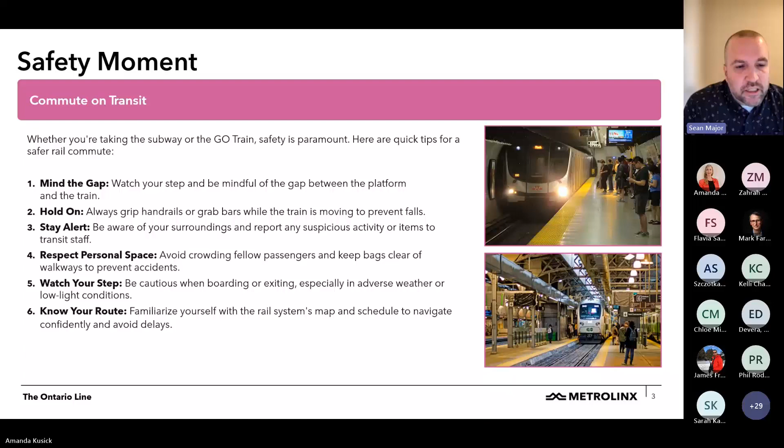Be sure to watch your step. The weather is all over the place, so sometimes it can be slippery out there. Before we start our journey, if you can familiarize yourself with where you're going and the schedule, you can navigate confidently and avoid any delays.

Welcome again, everyone. It's great to have you all here as we talk about piling activities in the Moss Park area. As I mentioned earlier, I'm Sean Major, and I'm the Senior Advisor for Community Engagement with Metrolinx for the Ontario Line. I'll invite all our presenters today to turn on their cameras, and we'll have them introduce themselves. I'll turn it to Daniel to introduce yourself.

Hi, good evening. My name is Daniel Sisra. I'm a senior manager with the Subways sponsor team here at Metrolinx. I'll pass it over to Eric.

Good evening, everyone. My name is Eric Devera. I am the Deputy Station Manager for Moss Park, and it is my responsibility to safely and proficiently deliver and construct the Moss Park Station for the community. I will pass it over to my colleague, Francisco, or Aga, if Francisco is not here.

Good evening. My name is Aga Szczotka, and I'm Environmental Manager for OTG. Great, thank you, Aga.

I want to talk through the agenda for tonight's meeting. We'll have a quick overview of the Ontario Line, speak to some progress to date, and look ahead at the construction that's coming. And of course, tonight we want to really focus on the piling work that's going to be happening in Moss Park. At Metrolinx, it's really critical that we are working together to try and reduce any impacts on community members as a result of the construction. We'll also have a Q&A and discussion at the end of the meeting, and I'll talk more about that in a moment.

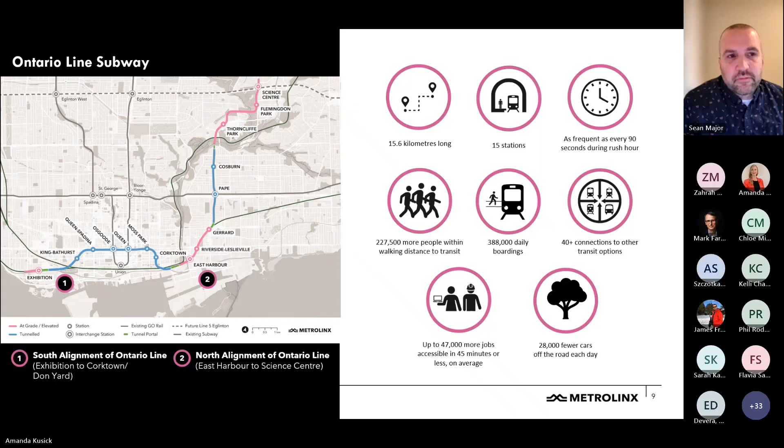I'll turn over to Daniel to speak to some details about the Ontario Line. Thank you, Sean. Yeah, so I'll introduce you to the project. I'm hoping that a lot of you have heard about the Ontario Line.

The Ontario Line is a 15.6 kilometer subway line that we'll be building through the city of Toronto. It will be going from Exhibition Station, as you've seen on the screen at the bottom left corner. Then it will go underground in the blue line, cutting through downtown along underneath Queen Street, heading farther east towards the Riverside, Leslieville area, before it heads north on Pape Street, cutting through Pape Station underneath Pape Station that's there, and farther north towards Thorncliffe Park, and eventually terminating at the Eglinton and Don Mills future station for Crosstown Science Center there.

Just some key facts around Ontario Line. Ontario Line will be a 15 station subway line with very frequent service, as frequent as 90-second service during rush hour. It will service a huge number of individuals and communities in the areas that it's touching, and even through connections, over 200,000 people will be at walking distance to the stations. This will basically generate over 380,000 daily boardings, which means a lot of people taking the subway.

The way the Ontario Line was designed and planned really encourages, was with the intention of creating connections and increasing reliability of the overall transit network, with over 40 connections, some major connections at the Queen Osgoode stations for Line 1, connections at Pape where this line will meet Line 2, TTC lines, as well as many TTC streetcar and bus connections, and 2 future major connections at GO services at Exhibition Station and East Harbour.

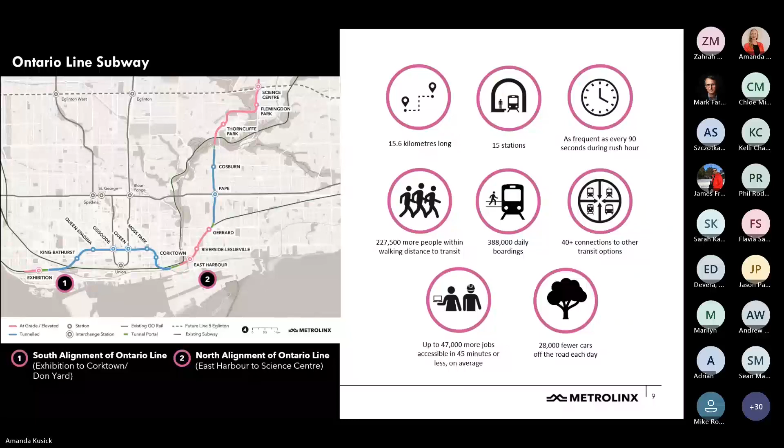The OTG group, the Ontario Transit Group, will be delivering 6 underground stations. 2 of those are very important complex interchange stations right underneath the existing subway at Osgoode and Queen, and they will do that while not impacting and maintaining the operations of those 2 stations, as well as one major above ground connection at Exhibition Station. Finally, while also building all the stations, the OTG will be delivering and building a tunnel between all these stations in the downtown, that's around 6 kilometers of tunnel.

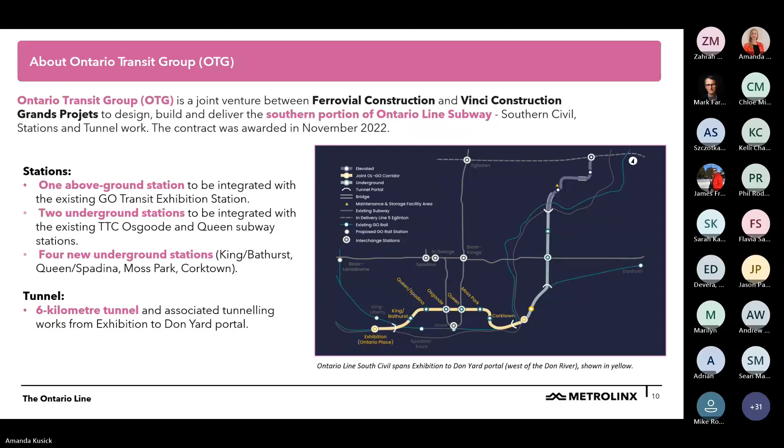So with that, I will hand it over to Eric to take us through the construction aspect of Moss Park.

So as detailed before, the main purpose of this program tonight is to discuss the piling operation and what the community can expect from that at Moss Park. But first, I'd like to give a little bit of context of what we've been doing to lead up to this milestone for the station, and then what we can expect after the piling completion.

Since the fall of 2023, in November, we have been installing what we call protection and preparation. For the protection, it is the hoarding installation, which is just a fancy way of calling our site perimeter fencing. If you've been in the area recently, that would be the plywood perimeter that we've developed around the site. Its primary purpose is for public safety, to delineate the public from the construction activities within the site, but it does provide additional benefits as well, which we will touch on later in the presentation.

For preparation, we have been rehabilitating the site within the fencing to construct a working platform that's going to be suitable for the duration of the project, allowing us to deliver the station proficiently and safely. All of those efforts have been leading up to this week, which we are now ready to begin piling. In the coming days, you will see the program we talk about this evening, which is going to allow us to begin the piling program. After we complete piling, the next steps in the summer timeframe are the station excavation, and after that will be construction of the station from the ground up. But we'll provide more context on that later.

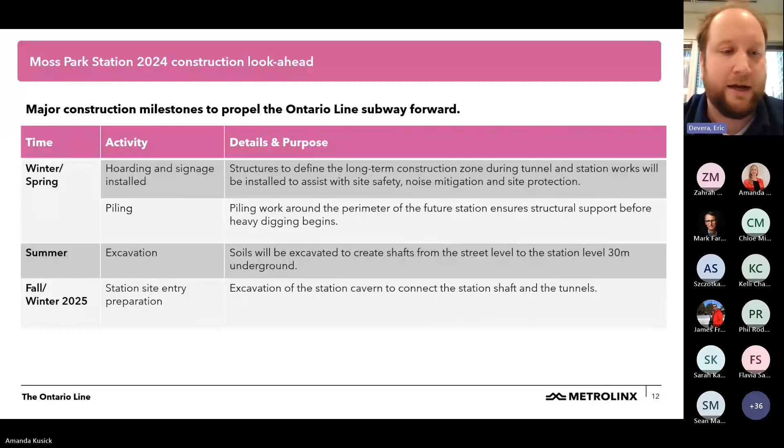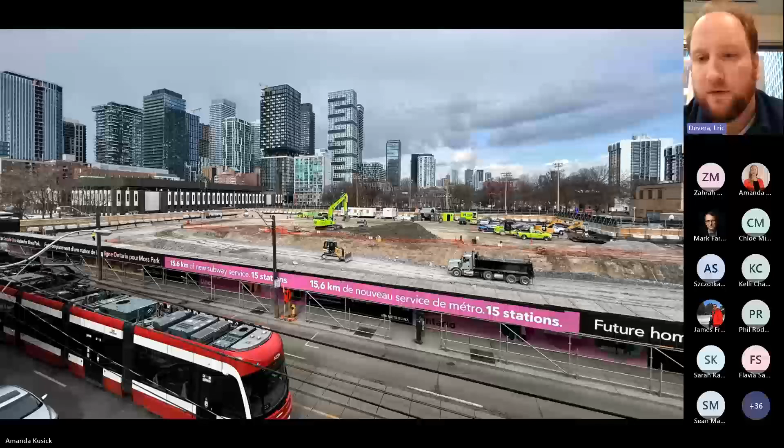As always, we try to provide visual context to the community to help better understand what we're doing and what we're trying to accomplish. Here's a good visualization of Moss Park as it was a couple of weeks ago, through our progress in February. You get an overlook from the Queen Street side here. Very visible is the perimeter protection, what we call the hoarding around the edge of the site, and a bit of context of what goes on inside the site for platform preparation. As it is today, it's a little more complete, which is ready for piling commencement. But again, this is to help people understand the methodology and process involved in our works.

A little more focus on the pile drilling. Before going into detail, I'd like to emphasize the word drilling specifically. I think it's very natural for people to anticipate the word piling with pile driving, which is another methodology that's pretty common in Ontario and in Canada in general. The unfortunate stigma about pile driving is the invasiveness, the impact - it's hammering. But the good news is we're not pile driving, we are pile drilling. That's hopefully going to be for the great benefit of the community and the local environment, as it should be much less invasive and impactful to the local surrounding.

So what is piling? It's simply a foundational technique we use to construct a support system in the ground, and it provides us stability and support to protect adjacent facilities and structures, which allows us to dig a hole in the ground, to put it simply, and construct the station from the ground up. It involves drilling multiple holes that overlap with each other, and these holes integrate to form a wall, which provides a watertight barrier, allowing us to excavate safely.

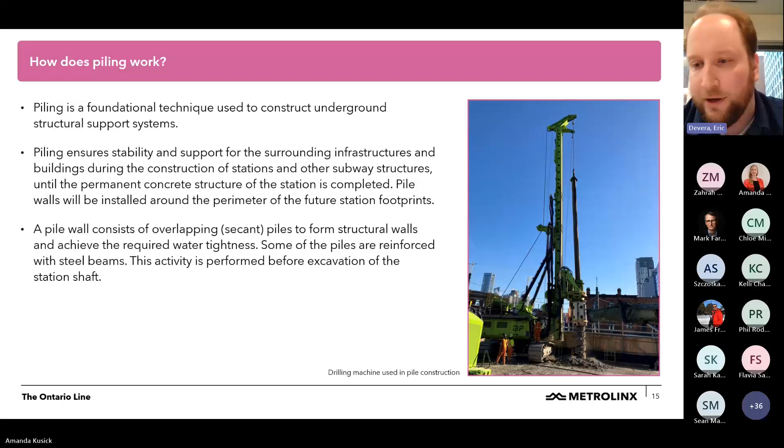The analogy I like to use is a swimming pool. If you visualize a swimming pool, the secant pile is simply the pool perimeter, the walls. But instead of filling the hole we dig with water, we will build a station instead. Next slide, please, Amanda.

A little extra detail on the piling program. In order to install all of these piles, we will drill holes of various depths, ranging between 10 meters and 14 meters, depending on where the bedrock is. These piles are each about 1 meter in diameter or slightly wider, and as I detailed before, they interlock with each other to provide cohesiveness and stability in a wall.

We construct them with alternating piles. They are called either filler piles or reinforced piles, and the reinforced piles are just another drilled methodology with extra reinforcement, a steel beam inside, to provide extra rigidity. We use drilling machines and a tool called a casing to safely drill holes so that it doesn't fall in or collapse depending on the ground conditions. That allows us to auger into the bedrock and then coincidentally pour the secant piles to form the watertight wall.

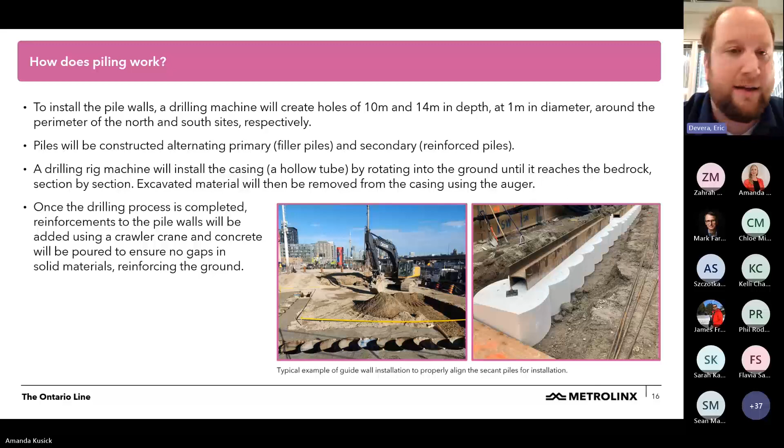Moss Park will be no different. Once we complete the piling wall, we will excavate down to the bottom of the shaft where the station is going to be installed, using the same methodology with struts and walers to help reinforce and protect the wall. That's to ensure the adjacent facilities, Sherbourne Street, Queen Street, Moss Park Arena, the Armory, and everyone's business and residence, that your building doesn't move, the ground doesn't move, and everything stays as it should be.

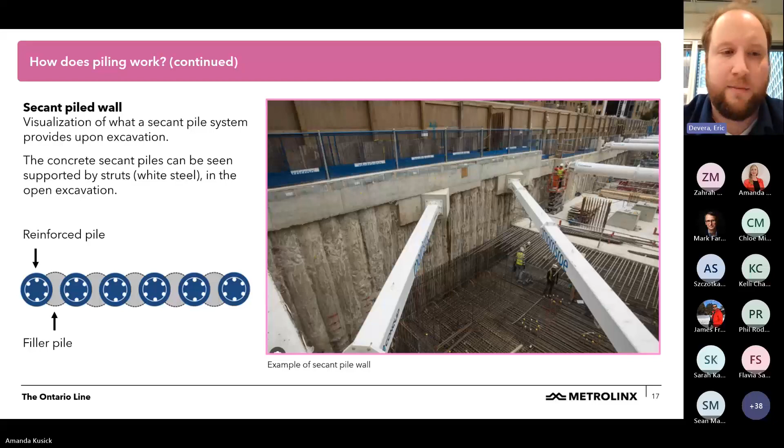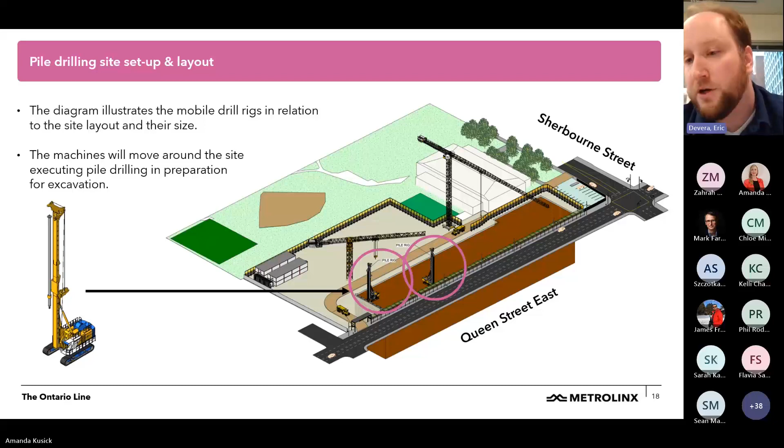In this 3D model, we do have representation of what the tower cranes will look like in Moss Park. But to be very clear, the tower cranes are not going to be installed during the piling operation. This is just to provide a futuristic look at some of the other features people can expect to see in Moss Park.

So let's talk schedule and sequencing. As I detailed at the start, the piling works are ready to begin now, and that begins with the guide wall installation I gave context on earlier. We'll begin installing the formwork around the perimeter of the shaft, to properly locate where each of these piles are going to go. That's going to be starting immediately within the next couple days.

For work hours, we are always going to do our best to respect daytime working hours from 7 a.m. to 7 p.m., as an effort to not have a major impact on people's evenings or sleeping hours in the local community. For an estimated timeline, with this operation beginning in the next couple days, the approximate duration is 4 months, so people can expect to see this relative consistency on a day-to-day time frame from now until the end of July specifically.

I have this here as an extra note, just as a caveat: weekend work or extended hours may occur as needed. I want to reiterate and stress it is not our intention to exceed the daytime working hours. We have this as a caveat for a very special circumstance. For example, if we were to be drilling a pile in the afternoon and we get a weather event, it rains really hard for whatever reason we weren't anticipating.

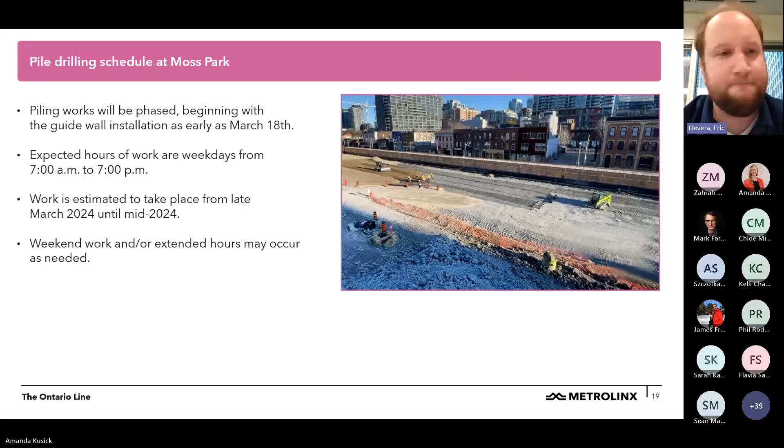Okay, some things to expect from the community standpoint. In conjunction with what we've been doing to prepare for the piling operation, we have become well-versed with the community specifically in terms of some specific impacts. Three major topics are noise, vibration, and air quality, specifically with dust. Naturally, we'll always look to mitigate these as best as we can, and we'll touch on a few of those mitigation factors that we will be using to help reduce these impacts.

But it stands, some of these will be a feature during the piling operation, hopefully to a lesser extent. Some of the equipment that we expect to use and what you can expect to see on site are going to be the drill rigs, which I detailed in the 3D model. We will have a mobile crane on site to help with the lifting methodology of the steel piles. There will be an excavator to help with installation of the guide wall. And we'll use concrete pumps and concrete trucks to deliver and install the concrete for each of the piles, okay?

As I said before, we will have daily cycling of trucks to deliver concrete to Moss Park. We'll touch a little bit more on that in a couple minutes. With this interaction of construction vehicles entering and leaving the site, we will always have certified flaggers at the entrance of Sherbourne and the exit of Queen, to ensure safe and positive interaction between construction vehicles and the continued usage of the sidewalks with the public. The last note is that the piling equipment will remain within the work site for the duration, which will be the midsummer timeframe, as I detailed before.

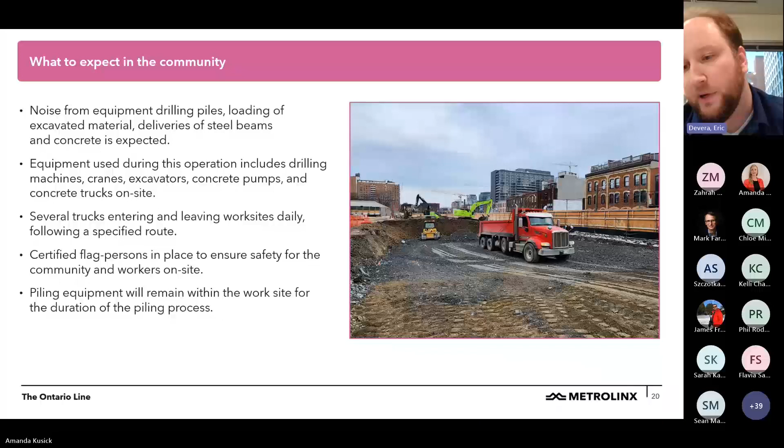Okay, some reducing factors that we are looking to implement to promote this experience and have as little impact as possible in the community. So more on the construction vehicles here. As I said before, we will be having a daily flow of concrete trucks to the Moss Park site. To provide a little extra context, our expectation is to install approximately 6 piles per day, 6 of those shafts per day, and each shaft takes 2 concrete trucks to pour.

So basic napkin math would detail that we should be expecting roughly 12 concrete trucks to enter and leave Moss Park daily. That would be scattered throughout the daytime working hours of 7 a.m. to 7 p.m., depending on when each of the shafts are being poured. The trucks will enter off of Sherbourne into the site, coming north from the Sherbourne-Queen intersection, and naturally they'll leave through the Queen Street exit, heading west towards Jarvis to head south afterwards.

One implementation that we're looking to promote is an always-forward methodology, to reduce any backing up of construction vehicles. Most people who have been around a construction site before have become accustomed to the beeping of reverse alarms, which can certainly be seen as a nuisance. With this concept, we always strive to have vehicles, construction equipment, and delivery concrete trucks driving forward to eliminate that impact. Okay.

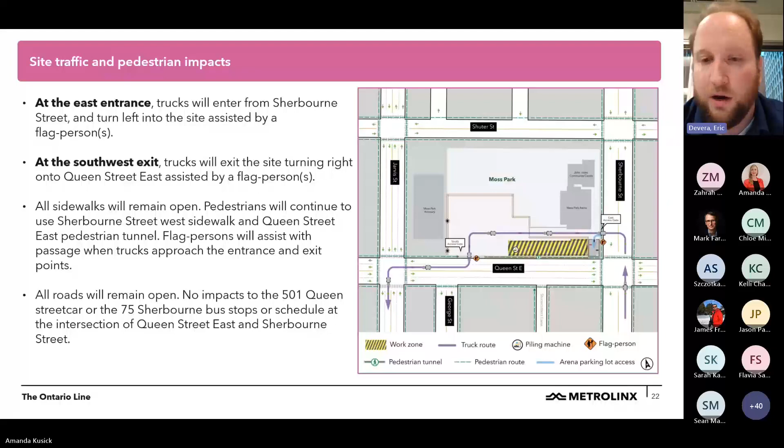Touching more now on those three impacts that we have been working with the community on thus far. Air quality is a big deal, especially for us. We always want to promote an environment that people want to be around and not feel suppressed by, and air quality is a big factor in that. We do have air quality monitors within and around the site to measure any dust or debris that would be generated from the site.

As we move into the summer timeframe here, through what would be a wetter winter thaw season, and then as we move into summer and things dry up, we will have water on site, for example, to suppress any dust generation and keep the air quality as clean as possible, of course.

The site hoarding, which is the perimeter fencing I detailed before, is a mitigating factor in terms of noise generation. I'll provide a little extra context on that in the coming slide. As I detailed before, daytime working hours are very important for us to maintain, to respect people's evenings and sleeping timeframes.

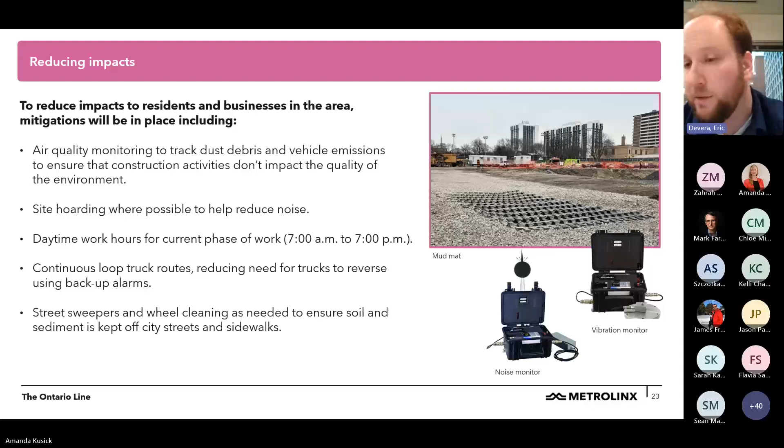Next slide, please. Specifically on some noise reduction methodologies, most importantly is the hoarding. It has a noise absorption barrier installed between the two plywood facings around the perimeter, and this is to reduce the noise impact generated within the site and contain it within the site.

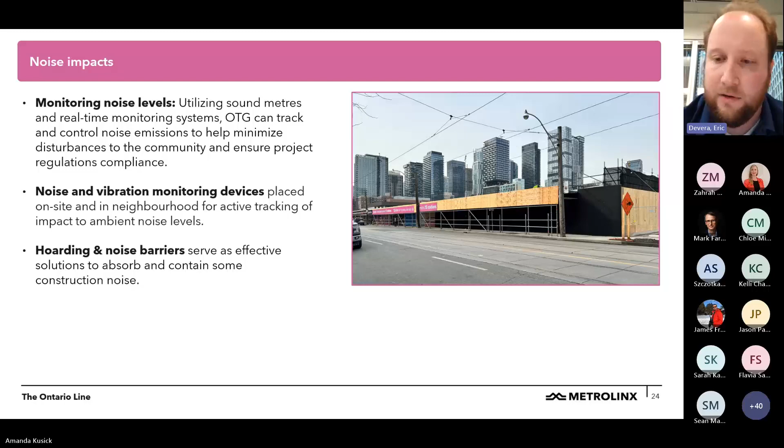We will continue using the operations I've talked about: daytime working hours, elimination of reversing trucks, all in effort to help reduce the noise generated within the site. Ultimately, similar to air quality, we do have noise and vibration monitoring systems as well. These are around the site perimeter and in some local buildings, and they monitor the impact we have on the community, keeping us compliant in regards to noise and vibration generation in Moss Park.

Lastly, some comments about vibration. With the site preparation, we had material compaction, which was well illustrated in an earlier picture. Placing some of the working platform material required large machines to make sure it was properly compacted, and naturally that caused some vibration that would have been felt by some of the local community. Our goal is to reduce this as much as possible moving forward, and that'll be true with the piling operation as well.

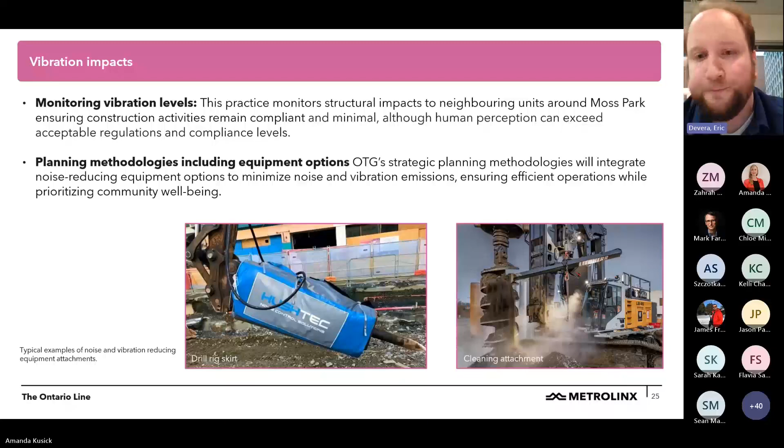Again, these features are all in an effort to help minimize the impact we have on the community, because obviously we want to construct this without making it a negative experience for anyone. And I think with that, I can hand it back to Sean.